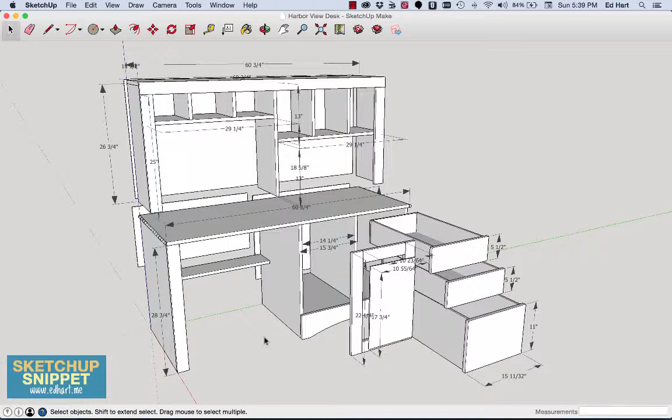In this SketchUp snippet, I'm going to show you how to make an arched footer for the base of some pieces of furniture. You can use this for, say, a dresser, or in this case, here's my Harbor View desk knockoff, and I'll just scroll in here, and you can see how I've got this footer underneath the desk cabinet with a nice little arch on it for a decorative finish, and I'm going to show you how to make this.

So let me jump over into a new SketchUp project. And the tools that we're going to use, we're of course going to use our basic drawing tools. And in this case, I'm going to use the rotated rectangle, which is this tool. And you can see our options here. And then I'm also going to use this 2-point arc tool. And I'm going to show you how this works.

So first, let me grab my rotated rectangle tool, and this base is going to be 30 3/4 by 6 1/4. So I'm just going to grab my pencil and click at the origin and drag this out and type in 30 and 3/4 inches. You can see how I put that right down in the bottom right where I have the length, and I'll hit enter. And now I'm going to drag my rectangle up 90 degrees, and I'm just going to type 6 1/4 inch, and there I have my rectangle. So let me zoom in on it.

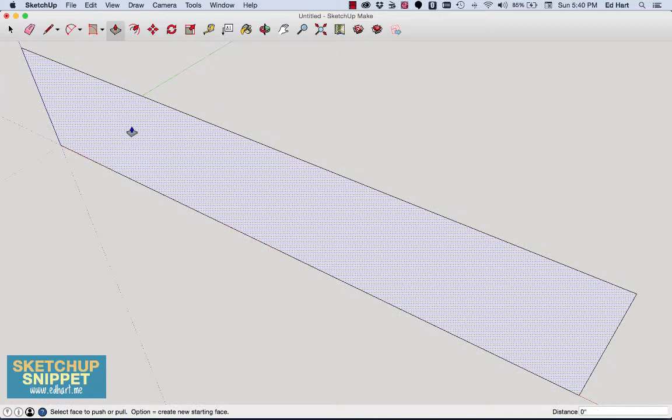And now I'm going to use my push-pull tool and turn this into a 1 by 7, and I'm just going to type 3/4 inches, because if you remember, the actual width of a 1 by is really 3/4 inches. Don't get confused by nominal versus actual measurements. And normally what I would do is I would triple click this and turn it into a group. But before I do that, I'm going to go ahead and make the arch.

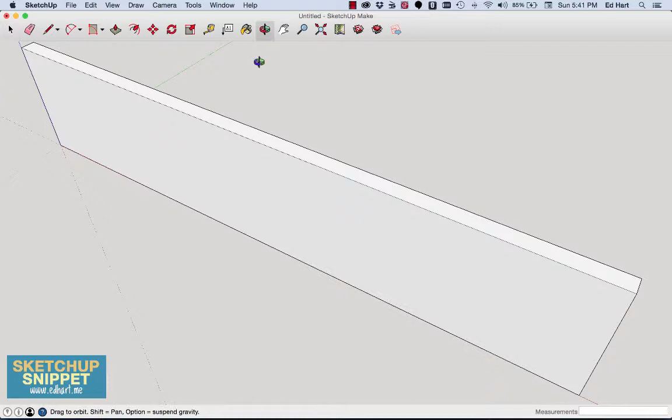So I'll unclick that. I'm going to rotate this so it's a little more straight on, and I'm going to zoom out slightly so I've got something to work with. And I'm also going to view my large tool palette, because I just like to work off this palette a little bit better than the top palette. So the first thing I want to do is create some guides.

I want my little feet before my arc starts to be 2 1/4 inches in, so I'm just going to use my guide here, and I'm going to drag over 2 1/4 inches to set a guide. Then I'm going to drag one from this side, 2 1/4 inches. And now I know I want that arc to go up 2 1/4 inches. So again, using my measure tool, I click on the bottom edge and drag up. And again, you'll see in the bottom right, I'm typing my measurements exactly, and I hit enter. So now I know I want this arc to extend from here and to just go up like that.

Doing this is easy with the 2-point arc tool. So now I'm going to click this tool. I'm going to come down here with my pencil at the intersection of the guide and the bottom of my board. I'm going to click. I'm going to drag over to the other intersection. I'm going to click there.

And now I'm going to place my third point right on the line, and SketchUp will snap it to the middle for me. Or if I wanted to, I could draw a guide all the way to the middle, but I know it's going to snap for me. And now I'm just going to click my mouse, and there I've drawn an arc.

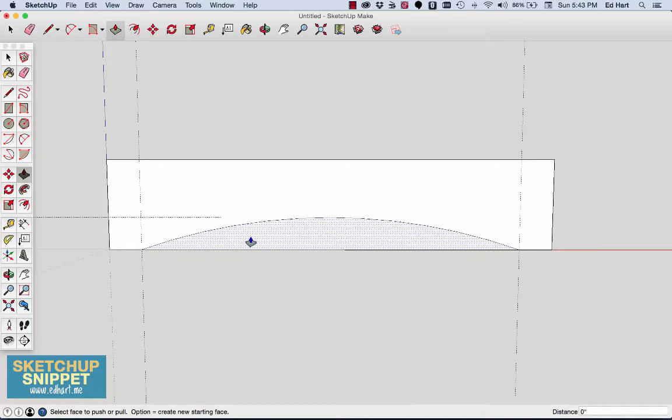Now, this is why I haven't turned it into a group yet, because I'm going to draw my line, and now I'm just going to simply use the push-pull tool on this newly created face. I will click and push in, and I'm going to push in 3/4 inches. And because I haven't turned this into a group, and I've pushed my tool in 3/4 of an inch, which is exactly the width of my board, that section disappears, so I don't have to click a section and start deleting. And so if I get my orbit tool, you can rotate that around and see.

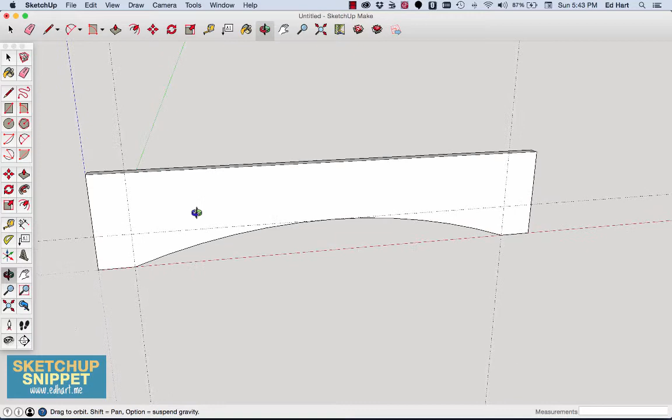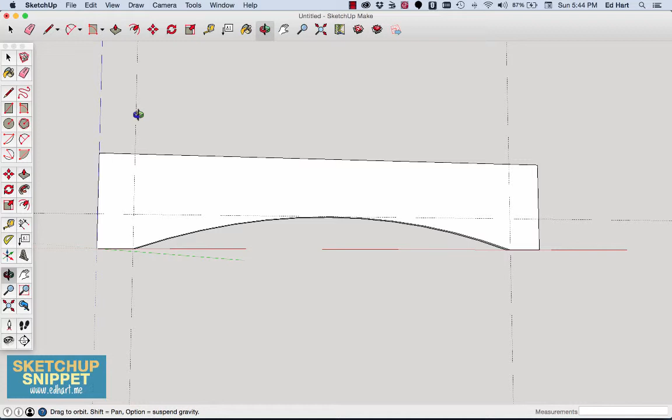Now in order to use it, I just have to turn it into a group. So I will triple click. Let me turn this up so you can see that effect. Triple click. So now all of the faces are highlighted. I'll right click and select make group. And so now I have a nice footer that, again, I can use. I can use this at the bottom of a dresser, I can use it at the bottom of a desk, whatever.